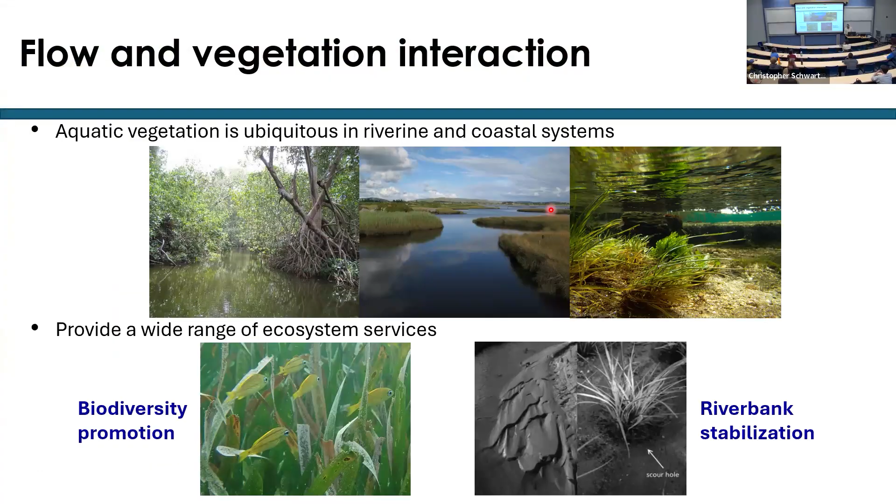So as you may know, aquatic vegetation is ubiquitous in river and coastal systems. We know that these ecosystems are quite important because they provide a wide range of ecosystem services like biodiversity promotion or riverbank stabilization. However, even though we know the importance of this ecosystem, the near-bed hydrodynamics, which govern a lot of critical processes such as sediment transport, hyporheic exchange, or even biofilm formation, need more insight in order to be properly addressed.

So still we know that we have some knowledge gap in understanding the physical processes that govern those interactions, and this is kind of the idea of this talk. Basically, I'm going to focus on the sediment transport and the idea of characterizing that near-bed hydrodynamics in vegetated flow.

In this case, I'm gonna try to show you the results for the emergent case, which can be a surrogate of mangrove forest, and also for the submerged case scenario that is kind of like a surrogate for seagrasses, understanding that the study that we are doing here is a physical model of seagrasses where we are not considering flexibility, for instance, but just want to get the hydrodynamic properties of the flow, like stresses and drag.

So just a quick overview of what we are talking about. So when we have a flat plate and there's no vegetation at all, this is kind of like the traditional development of a laminar flow over the flat plate, where as you move through the plate, you start getting eddies, and eventually the flow becomes fully turbulent flow.

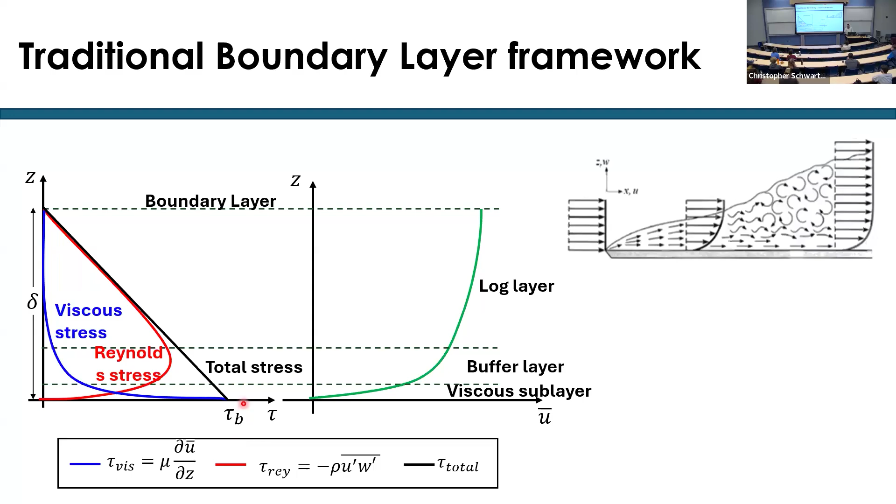However, when we move to vegetation, you will see that things change quite a lot, because all the stems or all the roots or the leaves of the vegetation will create turbulence, but you're also going to have an additional drag in the flow field, and this will alter the shape of the velocity profile.

And if you want then to study the near bed region, then you need to do that very close to the bed. So in order to do that, we need to define that bottom boundary layer region. So we need to somehow say, okay, what's going to be this 99% of the velocity that we used to define in the bare bed scenario?

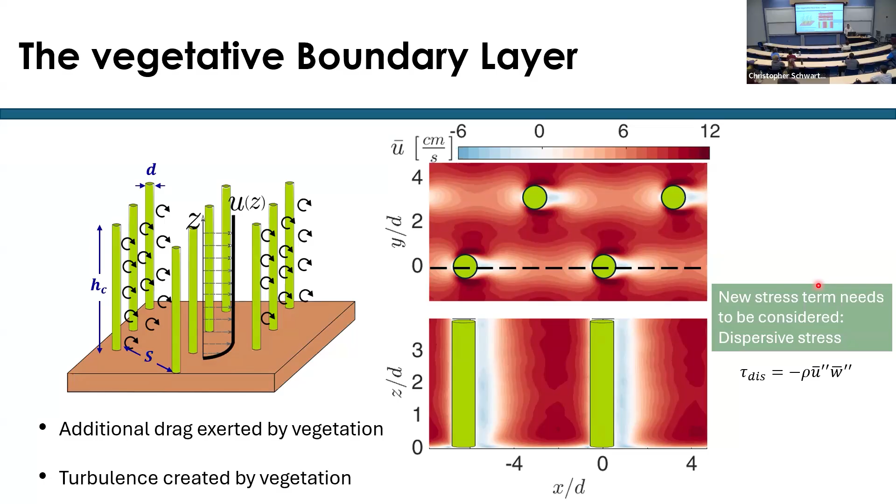So for that reason, today in the presentation, I'm going to be talking about two topics. The first is trying to understand how aquatic vegetation can alter the near bed flow characteristics, and we did that by combining laboratory measurements and numerical simulation. But also, we wanted to solve this specific question: can we actually develop a model for predicting bed shear stress in the presence of vegetation?

So as I was saying, there is a good amount of knowledge of how to predict bed shear stress in bare bed scenarios where there is no vegetation, but how can we now move forward to get a model for bed shear stress, and then analyze if with this new model of bed shear stress, we can actually say something about bed load transport, models that rely on a proper estimation of the bed shear stress.

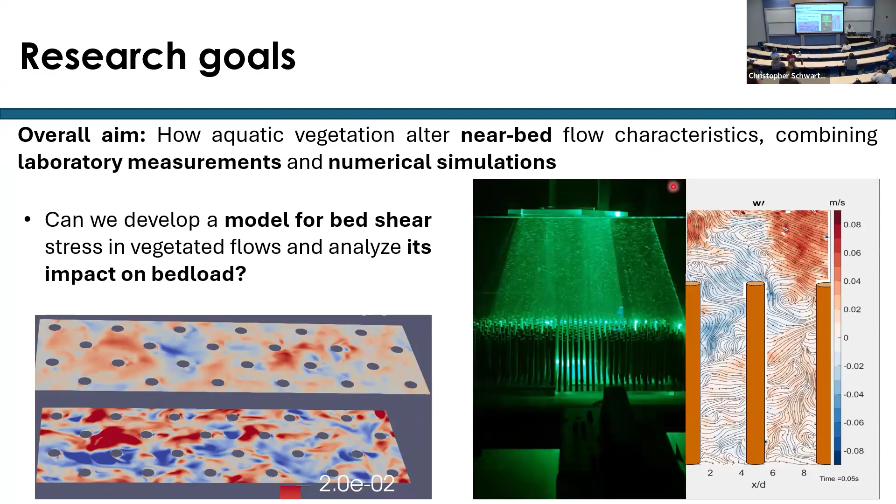So as I said, I'm going to use numerical simulation. Basically, we're going to use LES modeling in OpenFOAM, and we're going to use high resolution particle image velocimetry to try to get those velocity fields that we need for the near bed hydrodynamics.

We tested different velocities in order to increase the Reynolds number, having different types of flows, but most of them were turbulent in the scenarios that we were evaluating. And we also changed the depth ratio, which is the ratio between the water depth and the height of the canopy. I also did emergent, so there is a missing one there. So there are depth ratios of 1, 2, and 3.6 because we tested emergent cases.

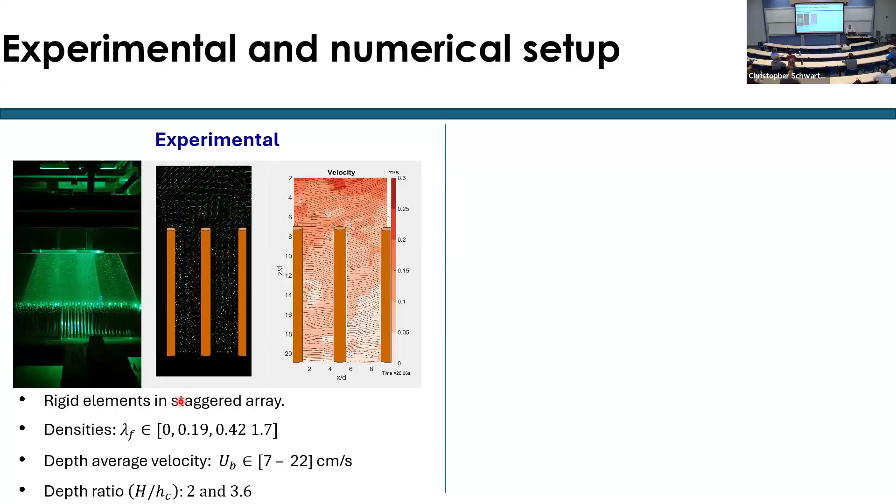And then for the numerical cases, we also used the same configuration. We put cylinders in a staggered array. We also changed density, even for denser regimes. We kept the velocity constant, so we just tested one Reynolds number for the numerical case, and we tested two depth ratios, depth ratio of 1 and depth ratio of 2. So this is the universe of data that we had available for studying the near bed hydrodynamics.

And what we did was try to characterize how this profile looks for different densities of the canopy, calculated using this parameter that we call lambda f, the frontal area per unit of bed area. So basically it's just the ratio between the frontal area of the rod, the diameter times the height, divided by the area where the rods are. You can extrapolate that to what people do in the field, which is count how many dowels you have per square meter, and that will be the same idea of the density of the canopy.

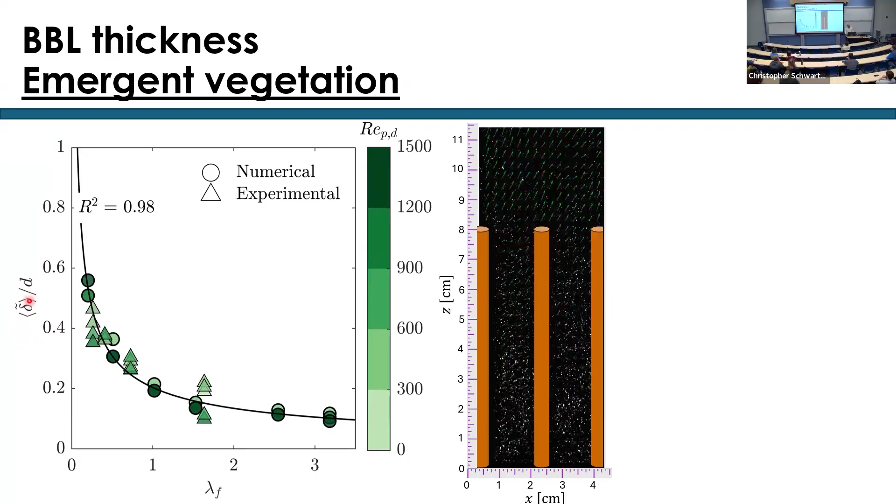So when we quantify how much that is, because if you see, this is a kind of dimensionless bottom boundary layer thickness, we were able to notice that in absolute value, for the range of density that we use, the bottom boundary layer thickness was between 1 millimeter and 6 millimeters, which is quite a thin region. Why was this so important? Because the way that we define that region actually made us understand later on the length scale where we can capture those stresses.

And basically, if you measure anything outside that region, you won't be able to properly capture viscous stresses or any term of the total stresses that I was mentioning before. So it poses the challenge that this is the result of the PIV measurement, and this is, in a real scale, the area that I need to properly measure and quantify to get high-resolution velocity fields. And also keep in mind that I'm doing this in different locations to get a spatial average.

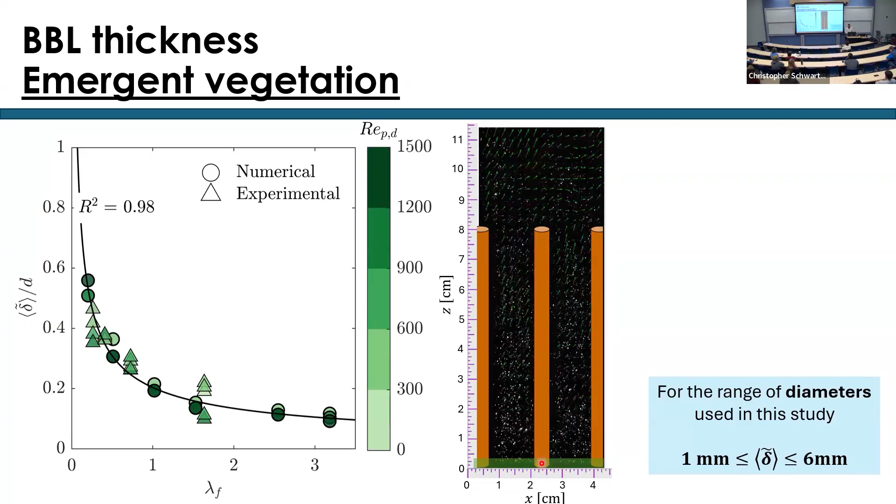And the reason for doing that spatial average is to get rid of all these fluctuations that you get in different locations. As you saw in the previous slide, there were these different values of the velocity profile at different locations. So we ended up using the spatial average between these 4 points as the spatially averaged parameter, which is the bottom boundary layer thickness.

And basically, if you are able to define properly the viscous stress, you will know that if you nondimensionalize that by the bed stress, then you will get an estimate of the bed stress. But then, as you go away from the bottom, the rest of the stress terms become important. So for emergent cases, what you're gonna find is that there is a region from a quarter of the bottom boundary layer thickness to the 3/4 where the 3 stress terms are equally important.

So basically, if you are able to measure at 0.5 the thickness of the bottom boundary layer, which, if you keep in mind the number that I said, means that you can even measure at 3 millimeters, based on the thickness that we have. And you decide to say that the bed stress is equal to the maximum Reynolds stress that you will find, you're gonna underestimate the bed stress by 50%. Because even there, which is where you get the peak of the Reynolds stress, it underestimates the real value of the bed stress.

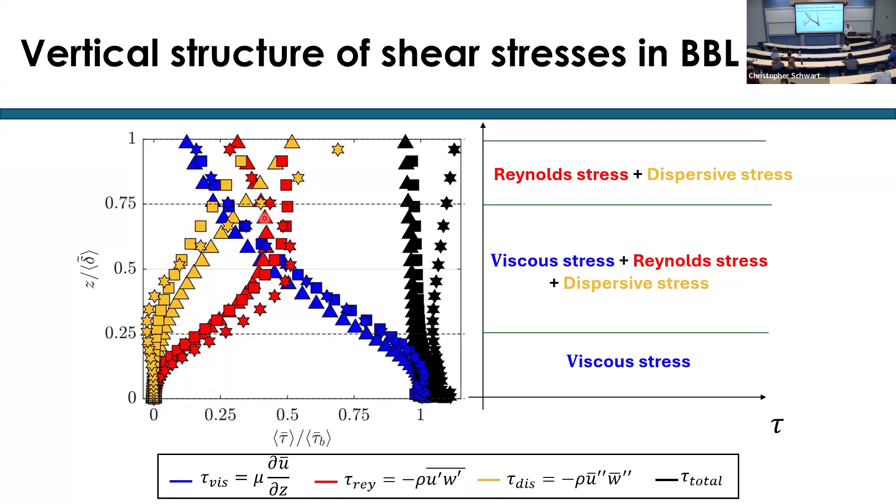But there was some missing link, because we were saying, okay, why is the bed stress not working, if physically speaking, the stress is what actually causes the motion of the sediment? The whole idea of the community was that the turbulence is more important than the stress. But what this result was showing is that probably they were underestimating the bed stress. Probably they were not able to properly capture it, given that the bottom boundary layer is quite thin, and getting velocities at that resolution with the instruments was very challenging for many previous studies.

So because of that, we decided to create a model for predicting bed stress. We know that it's quite challenging to get measurements to get a proper value of bed stress. So let's try to get a model from properties that we can extract more straightforwardly, like flow velocity, or even canopy properties like the density. So we decided to take again the total stress, which, as I was saying before, is the composition of the viscous stress, the Reynolds stress, and the dispersive stress.

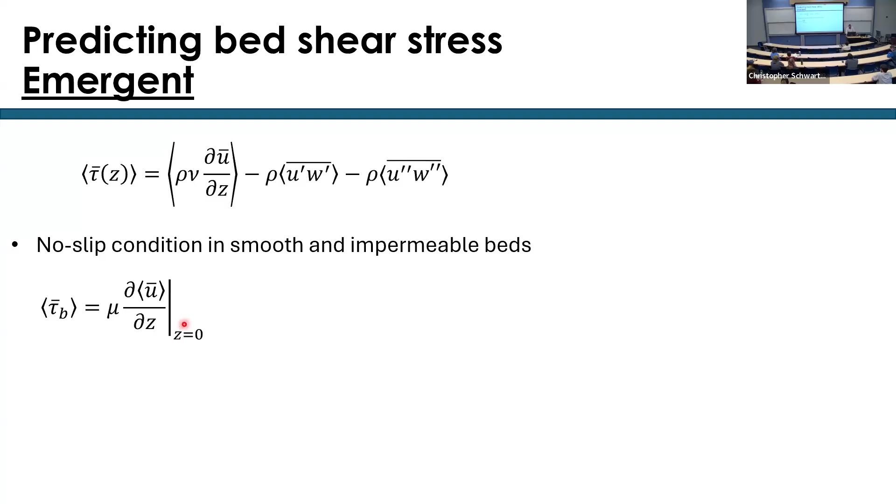And we know that because of the no-slip condition that you have in a smooth bed, and also as the bed is impermeable, at the bed the dispersive stress and the Reynolds stress have to decrease, and therefore the only important term will be the viscous stress. So basically you can approximate the bed stress as the viscous stress at the bed, or the gradient of the velocity as close as you can get to the bed. With our velocity measurements, we can actually estimate that.

Remember that when we defined the bottom boundary layer thickness, we assumed it's the height at which the velocity first reaches the unit value. The reason is that we can assume that for all the canopy densities, the profile will be self-similar in that region, always monotonically increasing before the overshooting processes we were looking at. So based on that, you can approximate the bed stress as the ratio between a reference velocity and a thickness length, in this case the bottom boundary layer thickness.

So we are saying it's self-similar within the bottom boundary layer. Instead of having the gradient, we're going to say it's a reference velocity and the thickness of that layer. So if we were able to get the thickness of the bottom boundary layer and define that reference velocity, we're probably going to have a model for estimating the bed stress. So this is what we did. We needed to get into the task of trying to understand what this reference velocity was.

If we are assuming self-similarity, the reference velocity has to be the velocity at the top of the bottom boundary layer, because that's going to be the reference that you have for the velocity, and then the thickness of the bottom boundary layer. But then when we compare that velocity with the pore velocity, that is the velocity taking into account that the flow is not moving freely. It will have some elements that will be obstructing.

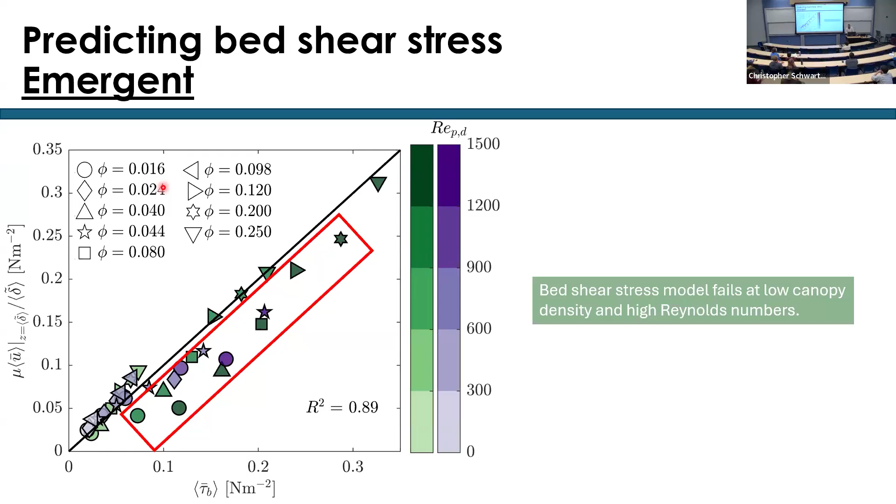You have sparse cases where there is not much effect of the rods in altering the flow field, but you are getting all of the events from the normal transition that you would get in a bare bed case. So we decided to test that hypothesis. If that is the case, our model relies on defining properly the length scale of the bottom boundary layer thickness. But if the bottom boundary layer thickness is not controlled by the canopy, but as a bare bed case, then we need to improve our model, defining what we call the effective bottom boundary layer thickness.

The effective bottom boundary layer thickness is basically the minimum value between the bottom boundary layer that we just defined or the bottom boundary layer that you will get if you have a bare bed. This comes from the fact that you can approximate the bed shear stress in a bare bed with a friction factor, as a drag from the bed, and a reference velocity. So if you do that, you can get the height of the bottom boundary layer for a bare bed. Basically, if the canopy effect is more important, you're going to have a very thin bottom boundary layer. If the canopy effect is not important, the thickness will be controlled by the bare bed scenario.

So when we incorporate this new effective bottom boundary layer, we get a way better prediction of the bed shear stress. So there we have it. Now we have a model that, as long as we can get the bottom boundary layer thickness and this reference velocity, we can get an estimation of bed shear stress.

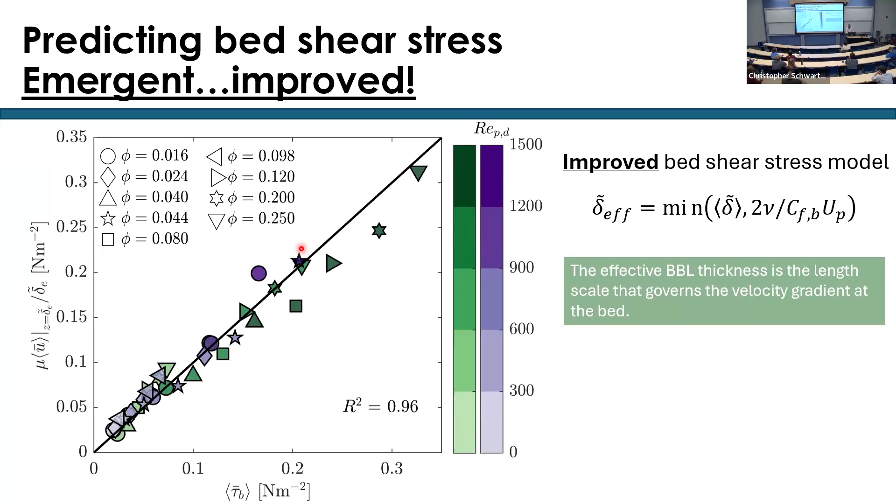So we then decided to move to the submerged case. It turns out that submerged vegetation is a more challenging question, because here the water will be higher than the vegetation, that's why it's submerged. You will have a part of the flow where the velocity will be reduced by the drag exerted by the vegetation, and another part of the flow that is not affected by vegetation that is going to be faster.

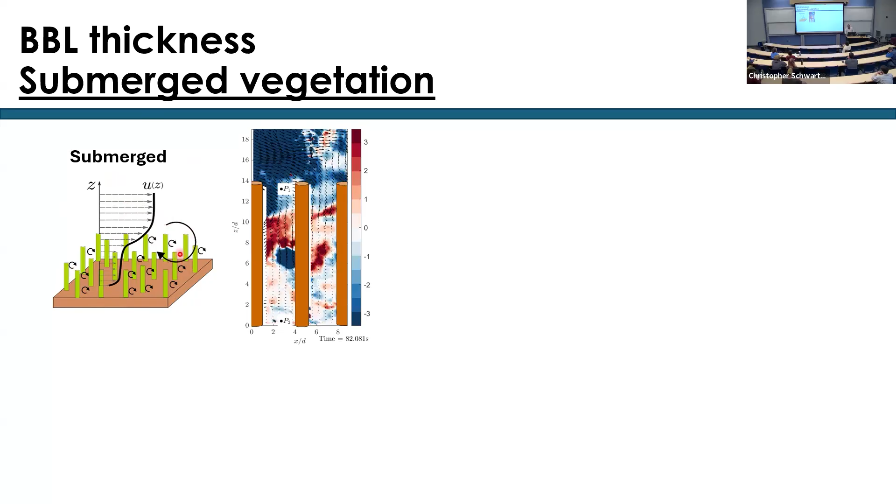So basically, these differences in the velocity create another turbulence scale that we call the canopy-scale turbulence. The main effect, the name that we use, is Kelvin-Helmholtz instability. So this is kind of like a roller vortex that forms at the top of the canopy. And depending on the density of the canopy, these vortices can be confined just to a layer around the top of the canopy, which is what you can see here.

Or if the canopy starts becoming sparser, then you can get these vortices actually penetrating all the way to the bed and altering the nearby hydrodynamics. So what we wanted to know is, can we use our predictive model of bed stress for submerged vegetation? Would it work just for dense cases? Would it work for sparse cases? What will happen when you have transition and these vortices actually alter the whole hydrodynamics and therefore the structure of the bottom boundary layer thickness?

So this is just a representation of the velocity fluctuation. This is taken from the PIV. This is an animation that I created based on the PIV measurement. And what you see is that sometimes you will get these big vortices creating sweeps, which are high momentum fluxes that go from this layer into the canopy, and then you will also get ejection events. So you can see that the whole velocity field within and above the canopy is actually being altered by them.

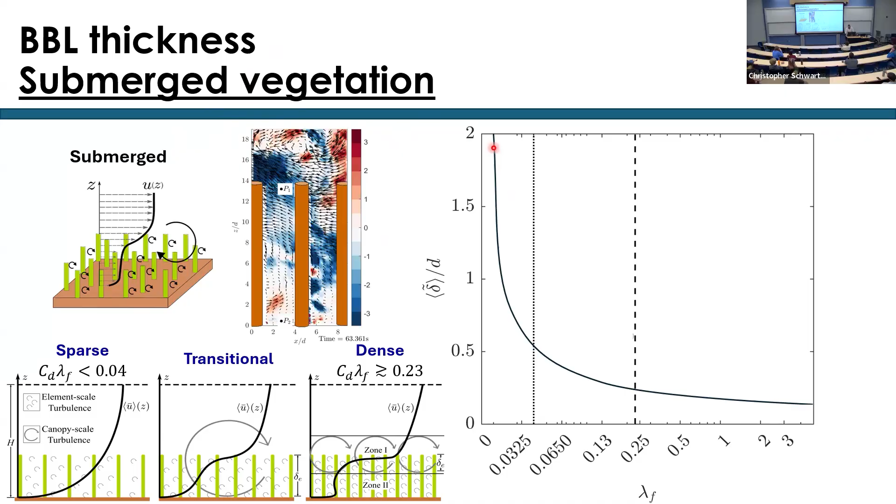So as I was saying, we did the same test. This is the model that we have for emergent vegetation that I just showed you before. This was the line for the relation between the bottom boundary layer thickness and the density for the emergent case. And when we did that for the submerged case, this is what we found. We were able to change the Reynolds number. We were able to change the depth ratio. All the red colors are the highly submerged canopy, where the water depth is 3.6 times the height of the canopy. The other cases we tested were when the water depth was twice the canopy height. These are the blue color.

So what you can see straight away is that the bottom boundary layer thickness of the submerged case scenario is actually thicker than the one that you expected in the emergent case. There is important variability with the submergence, but the most scatter happens in the transitional regime, where you have these big vortices that can penetrate all the way to the bed. So as we could measure the thickness of the bottom boundary layer, we could test our model for the shear stress.

And before doing that, we decided, let's just measure the behavior of the shear stress with the density. These three regions are the same three regimes that I just defined: the dense regime, the transitional regime, and the sparse regime, based on the density of the canopy. What you find is that in general, the shear stress decreases as the density increases. This is something people expect, because with denser cases the velocity within the canopy is smaller, and then the shear stress should be smaller.

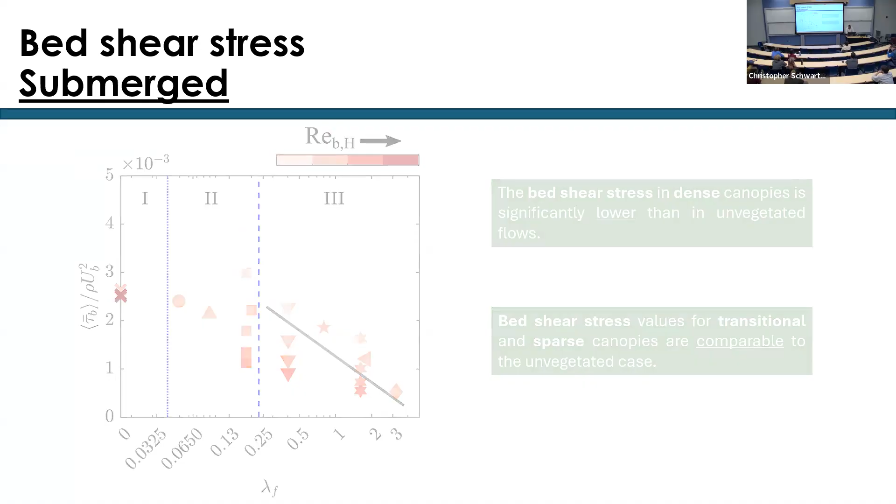So in general, we decided to look at the structure of the total stress within the near-bed region in submerged vegetated flows, based on the previous result. And we found quite an interesting result: when we looked at sparse vegetation and the behavior of each of the stress terms, the sparse case scenario resembled the bare bed case. So basically, submerged vegetation has a stress structure that is quite similar to the bare bed.

Of course, you will have some changes in the dispersive stress, because the vegetation is still altering the velocity field, and therefore you're still going to have heterogeneity in the velocity field that will induce a form stress, which is this dispersive stress, compared to the bare bed, where you can see it is always 0.

But in general, you get the same behavior for the bare bed. But then when you compare the dense submerged cases with the emergent, you also see that they are very similar, which means that apparently we have two limiting conditions where, for dense submerged vegetation, the stress structure resembles the emergent case that we just studied, and the sparse submerged case resembles more the bare bed.

So with that in mind, we decided to just jump straight and test our model, and this is what we found. So basically, if we use our model of shear stress, as I was saying, we need to define the reference velocity, that in our case was the pore velocity, and then the effective bottom boundary layer thickness that I just said. So we were able to compare for different densities the ratio between the measured shear stress, which is this, and the model that we are proposing, which is this one.

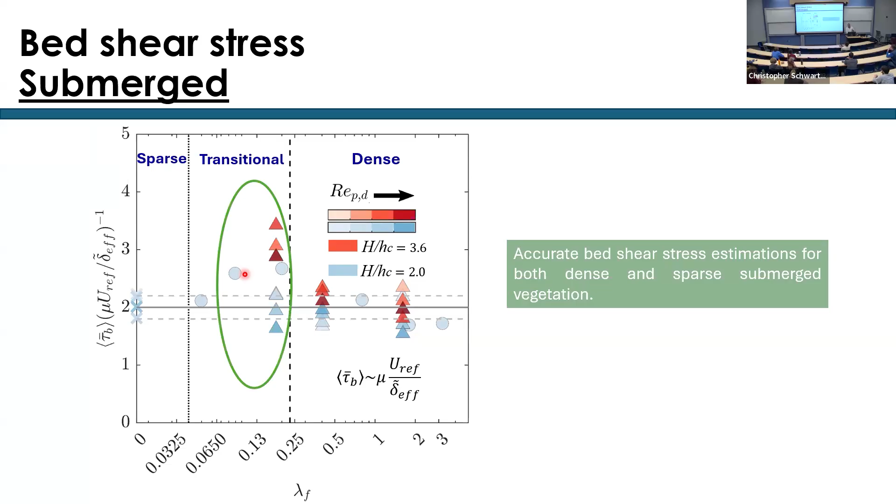So what we decided to do is, okay, our effective bottom boundary layer thickness relies on the fact that we need to define properly a reference velocity. And if you recall the velocity profile that we have in submerged vegetation, as you go transitional, it's very hard to get a reference velocity out of this profile. There is nothing that will tell you exactly what the reference velocity will be. When you get dense, you start getting some shape similar to what you get in emergent, so you can roughly say, okay, this will be close to the emergent case.

So we decided to use the depth-averaged velocity within the canopy layer. So basically we average over the entire canopy region and use that as a reference velocity for the transitional regime. And then redefining that reference velocity allowed us to check again the bottom boundary layer thickness for the submerged case. And this is the definition of the reference velocity as we change density and Reynolds number. And then when we tested our bed shear stress model with the new reference velocity, we got a way better result compared to the previous model.

So we could actually say that as long as we define properly the reference velocity within submerged vegetation, you will be able to also get prediction of bed shear stress. Keeping in mind that the reference velocity for the transitional regime will be the depth-averaged velocity of the canopy, which is this one that I was just telling you about.

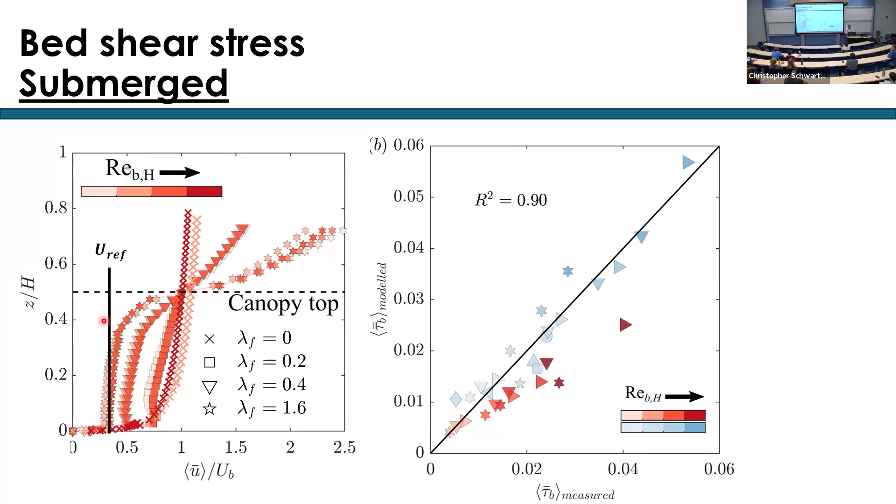So it's quite interesting because this paper was released after my model of bed shear stress in emergent canopy, and basically what they were showing was that we tested the new model for predicting bed shear stress, and we still are not getting good collapse with the data. But if we take, for example, the Meyer-Peter-Müller formula, which is in terms of the bed shear stress, and we recast that formula using the TKE, and this is the funny part, the way that they recast TKE is by this expression, and this expression is an empirical relation that is just valid in bare bed cases, but they still use it for vegetation.

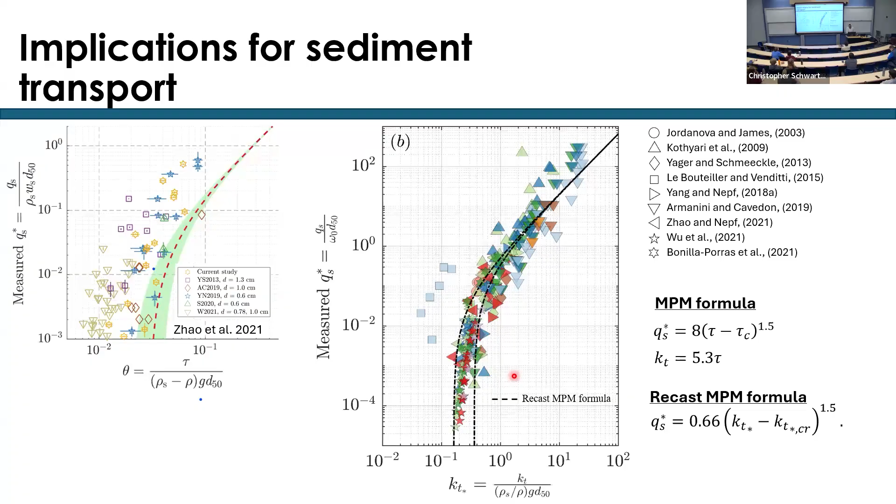So this is something that for us was very challenging to think about, because we were confident about the bed shear stress model. So we had to look into what they were doing when they were applying this Meyer-Peter-Müller formula, right? So we know that they are actually using our model, and what they are finding is that if you extrapolate the bed load transport all the way to zero transport, which is going to be a very small value of transport, kind of like just a curve here,

what you will see is that actually the critical value for incipient motion when you have vegetation is actually lower than the one that is predicted by Shields. These two curves here are the critical value predicted by Shields. So we say, okay, if you combine the bed shear stress formula with a reduced critical Shields parameter, you should be able to get a better prediction of the bed load transport.

And the physics behind that is that when you have vegetation, you will have an extra turbulence that is affecting the velocity field near the sediment grains. And this velocity field will actually change the pressure field that is felt by the grains, which, if you go to the most fundamental part of the critical Shields value, is just a ratio between the lift force that you get and the apparent weight of the sediment at the end of the day. So it's physics of two forces.

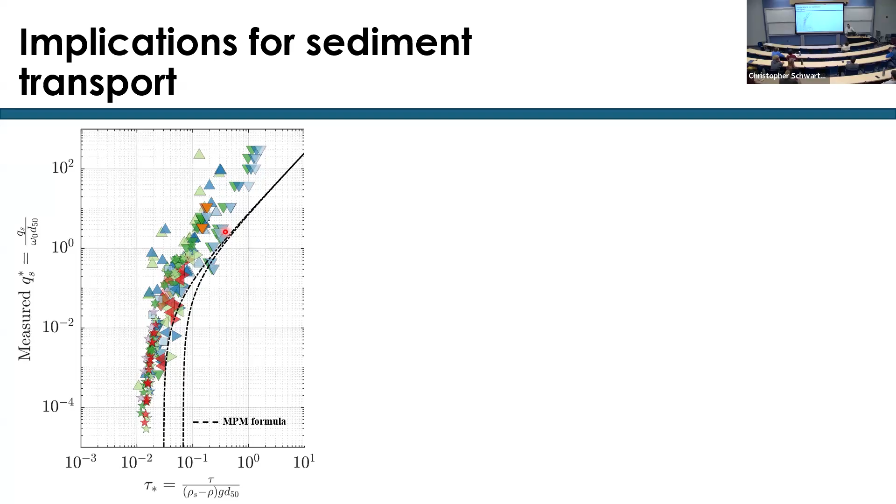And the hypothesis that we were saying is, okay, in vegetated flow, the lift force is actually higher than what you get in a bare bed scenario. So therefore, the Shields curve to predict the critical value is not the appropriate one. So luckily for us, there was some research from the group of Professor Rafael Tinoco from Illinois, that did some estimation of the critical value of the Shields parameter for emergent canopy flow, and they found a parametric relationship saying that the critical value depends on the canopy density, and it basically decreases.

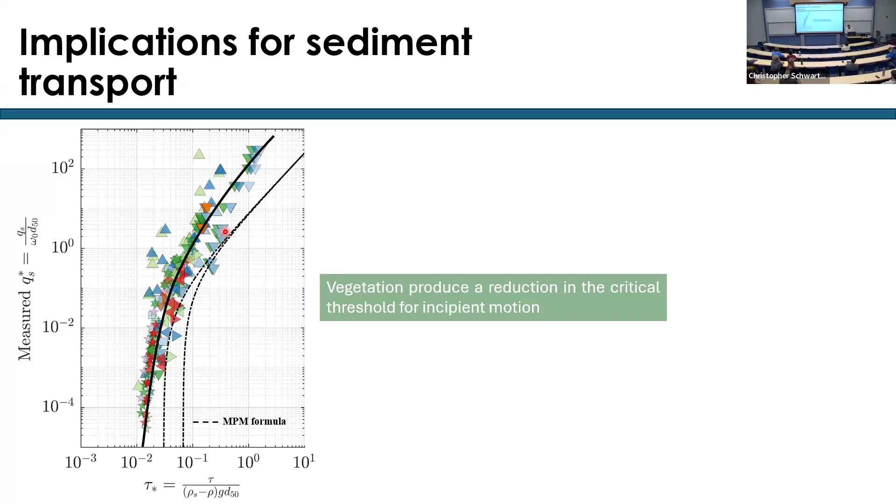So what we decided to do is say, okay, as we know that the threshold for incipient motion is actually lower than the one typically predicted by the Shields curve, we're gonna incorporate that into our model and test the predicted bed load transport against the measured bed load transport. And when we compare our result with the turbulent kinetic energy, we again recover a good collapse. So we are not assessing which model is better. We were just trying to find the missing link, because the TKE seems to work, but the bed shear stress wasn't working.

The reason is, first, they weren't measuring bed shear stress in the region where you need to measure if you want to properly get that value. And the second is, when they were testing the models for bed load transport, they were using a wrong critical shear stress value, because they were using the Shields diagram to predict that. And in vegetated flow, this doesn't work anymore. So if you consider both things, your prediction of bed load transport, this thick line here, goes as expected, and the physical meaning of stress being the driver of sediment works.

However, then comes the question, which is the final part of the PhD. Is it the TKE or is it the shear stress? Because at the end what you are telling me is that if you do a proper estimation of bed shear stress and a proper estimation of the critical Shields value, you can get a good estimation of bed load. And if you use the TKE, you're also gonna have a good estimation of bed load.

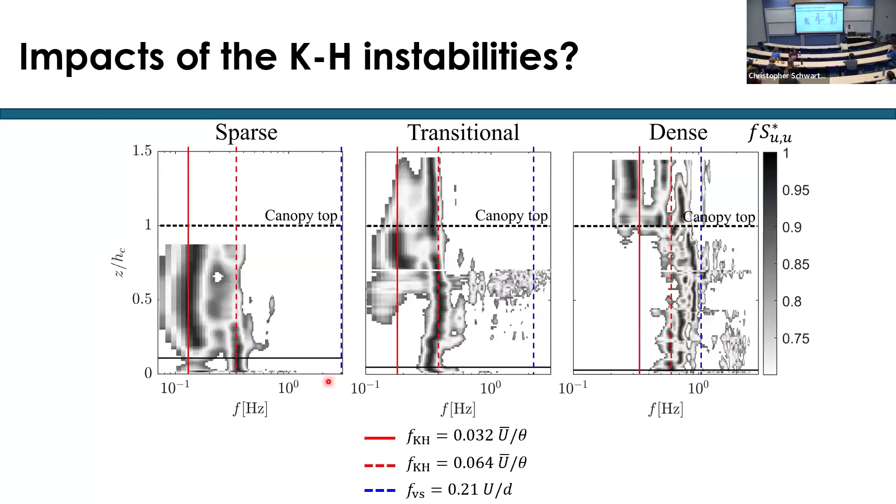So you see that sometimes you will have very high sweeps and ejection events that you can record at the bottom, but there are sweep events and ejection events that you won't record at the bottom. So we believe that it could be related to the second harmonic that we are saying. If you have a Kelvin-Helmholtz instability at the normal frequency, it will be filtered out by the canopy, but if it turns out to be the second harmonic, it is probably not able to be filtered out and will alter the near bed hydrodynamics.

So in conclusion, basically we have 4 main take-home messages. First one is that the bottom boundary layer thickness is primarily controlled by the turbulence generated by the vegetation. This was the last plot that I showed you, whether it was bed shear stress or TKE. We also were able to claim that if you have accurate estimation of bed shear stress and the critical threshold reduction, then you can get a good prediction of bed load transport in vegetated flow.

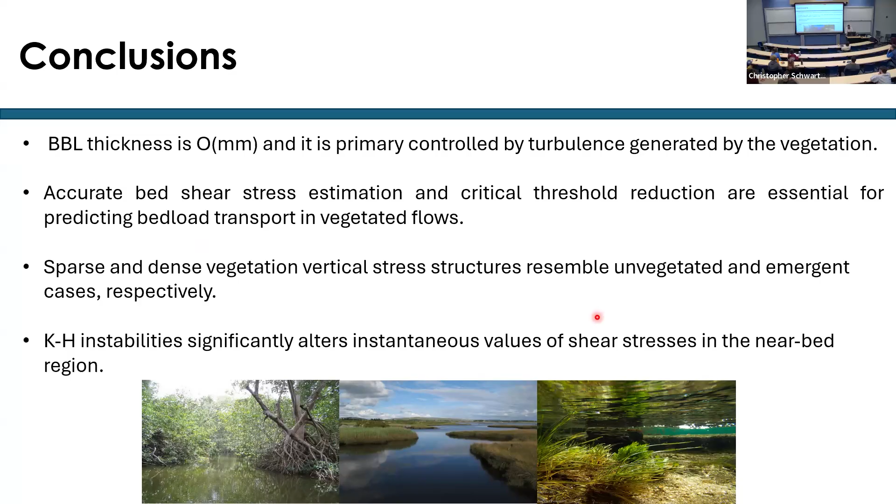And the last one, that I showed you, is that this Kelvin-Helmholtz instability alters instantaneous values of shear stresses in the near-bed region, especially what you get is these second harmonics that are not able to be filtered by the canopy. So that was pretty much all that I have to show you.

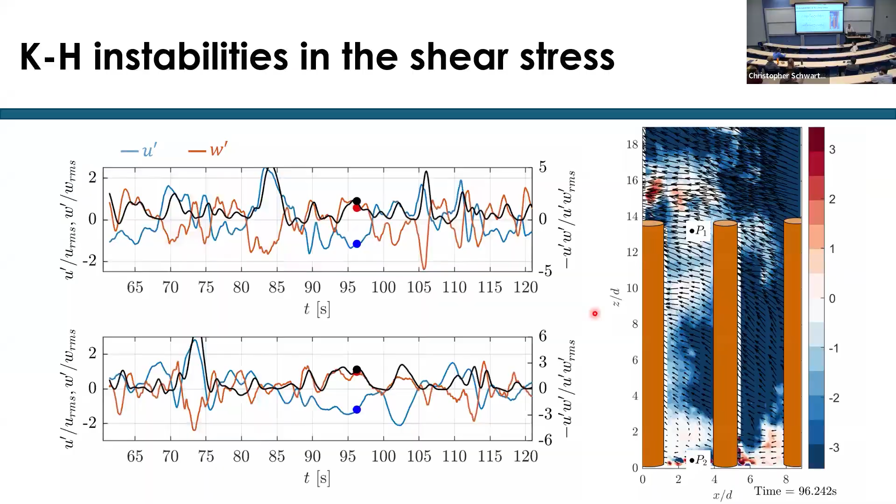What was that animation from two slides ago? This one? Yeah, this is measurements from the PIV. Okay. About numerical experiments? Yeah, with the numerical modeling we were combining both. In all the results I was presenting, one color is numerical and the other is experimental. The experimental ones had different Reynolds numbers, and the numerical just one. So we were combining the OpenFOAM results and the measurements to increase the data set.

I didn't show it here because it was not part of the story, but we also used the numerical modeling to inform the best locations to capture the spatial variability of the variables we wanted to measure. Because the main limitation of the PIV is that we have limited locations, so we couldn't measure all the places needed to get a full spatial average.

So we used that numerical modeling result. It has the capability to resolve 3D, the flow in three dimensions. We could actually get the full spatial variability in the numerical modeling. So we were combining both, but also using that to inform where were the best locations to actually do measurements

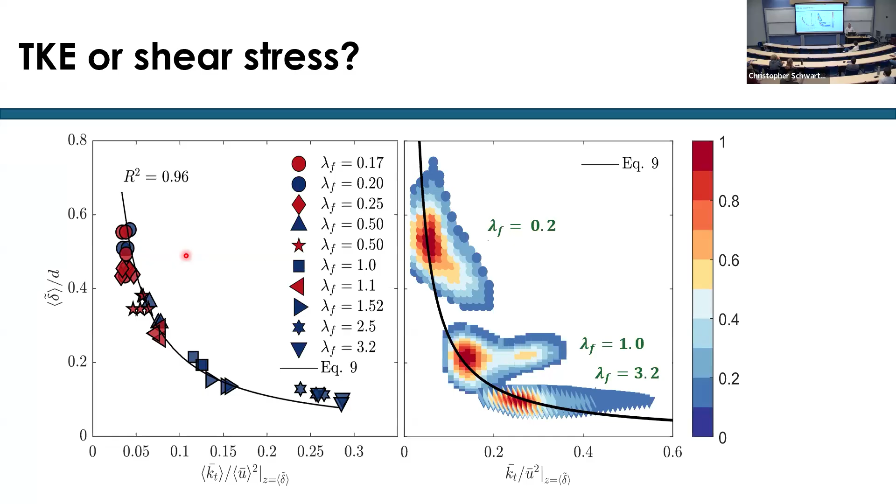with the PIV. Your numerical experiments, one of your early slides, you showed a figure of your numerical domain. It looked like it was 2D in the horizontal. Did you actually? Yeah, that was just a top view. I can show you. So you did do 3D models? Yeah, it was a 3D. Great. It's just the top view of how we did the element array.

So basically, we just have this staggered array. We did a cyclic boundary condition because we also need to guarantee that the flow is fully developed, canopy flow developed. So we were running the model in this small domain because OpenFOAM modeling takes a lot of time. So we were running with a cyclic boundary condition, 15 flow-throughs to guarantee this fully developed condition.

And then we were taking the average after 45 flow-throughs to get good statistics for the time average, basically. I see. And this is just a top view. I should have put the top view. So it's a 3D model actually, it's not 2D. No fluid structure interaction, I suppose. Just keep those pieces of grass totally rigid. Yeah. We just impose a no-slip boundary condition as well.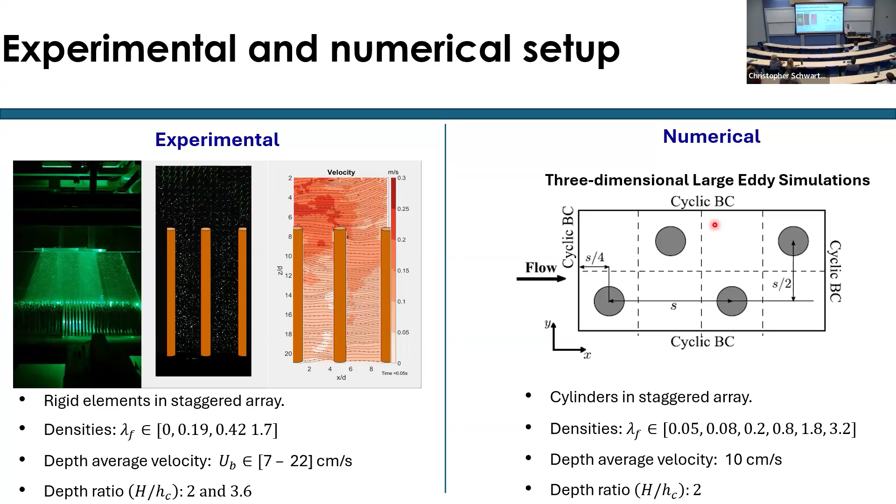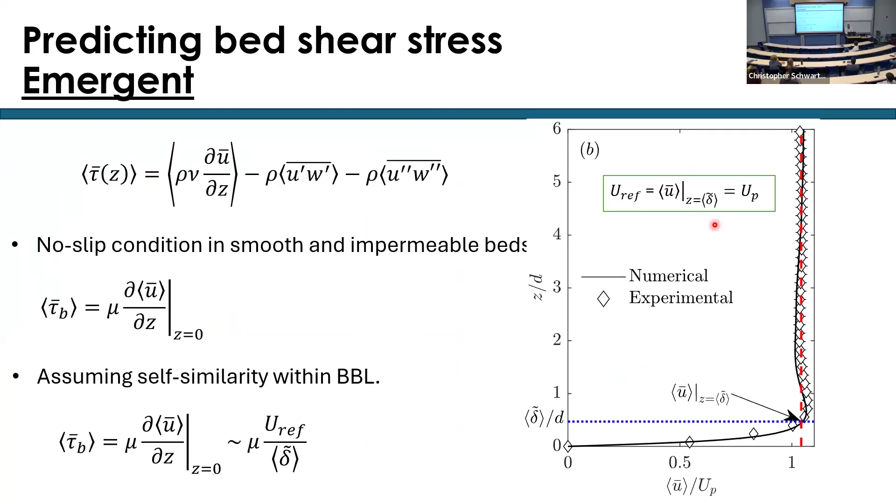So basically, if you see around the rod, you can get a bottom boundary layer if you measure it, because as they were rigid and fixed, you can actually develop the bottom boundary layer around the element. I was trying to show a picture, but I didn't put many animations of the numerical modeling in this one. I just integrated the whole data in one plot.

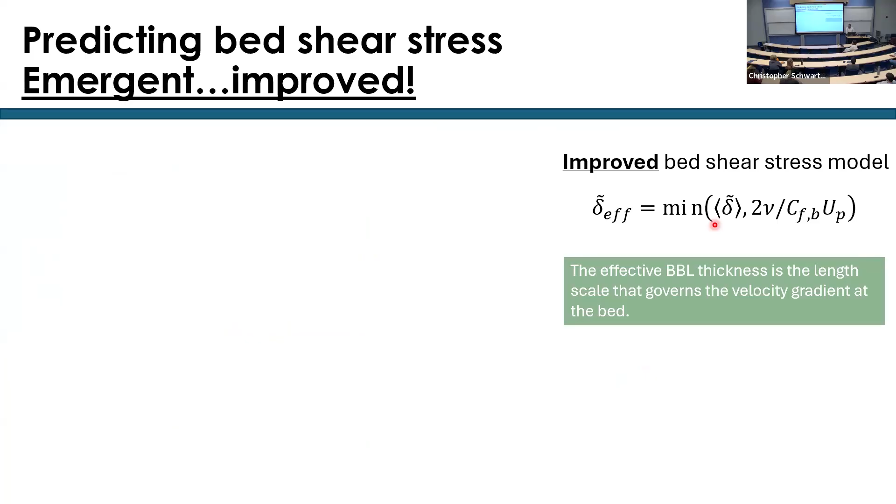I think we're a little over. I think if it's a quick question, we can do it. Professor Mandel's got lots of questions.

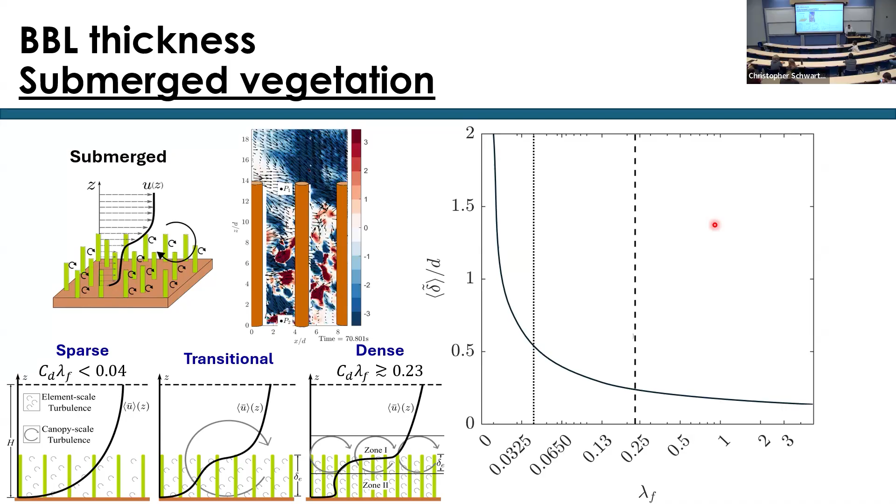I guess one of my questions is, do you have opinions on, if we want to move the community towards using the bed shear stress model, how do we better measure it in the lab and in the field? Yeah, so I think the next step is to properly define what we call the critical incipient value of the Shields parameter, which means we are quite confident of the bed shear stress model that we developed, keeping in mind that there are limitations of the model.

You can apply it to field conditions with a lot of restrictions. If you are thinking about seagrasses, there is flexibility that is going to be impacting the flow. But in ecosystems like the mangrove, where they are stiff and emergent, you will probably get a better performance of the model. But still, if you don't know what the critical value is going to be, none of the formulas will work at the end of the day.

So I did another test. I didn't present it because I knew that project could have taken longer, which is testing all the available formulas for bed load transport using the new bed stress model and the modified critical value. And most of them actually perform quite well once you define both. So now the bottleneck is to define that critical value. So I picture experiments trying to reproduce a Shields curve, but with different canopy densities and different sediment sizes, in order to properly estimate that.